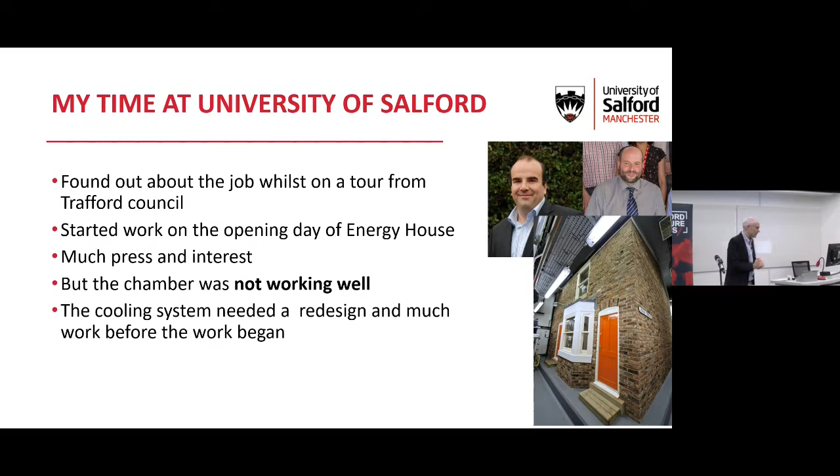So between ourselves, Nigel, who was there, and Steve, we got it all running and got it to where it is now, which is a world-class facility. But we had to do some work on it. Some people inside the university weren't happy with what I was doing and what Energy House was doing. I used to get nice notes stuck on my door by very senior academics every morning for about 6 or 7 months. I used to throw them in the bin and have stand-up arguments with academics about what we were doing and why it was the right thing to do. After a year, it went away, and when the cooling works were all complete, I started my role.

Around this time, myself and Will - there was only me, Will, and a guy called Mo when we first started. We set up the Applied Buildings Engineering Research Group, and then Will became my boss. That's generally what he does - he just stands and looks up at things and gets things done.

So why do we do all this? It's probably quite obvious to many in the room why we do it. Climate change is happening. The Earth's surface temperature is gaining heat very quickly, and it's up about 1.1 degrees since the pre-industrial era. We've had the 7 warmest years between 2015 and 2021. This happens most across our land rather than across the sea, and it's also more than twice as fast in the Arctic. So we've got severe problems all across the globe.

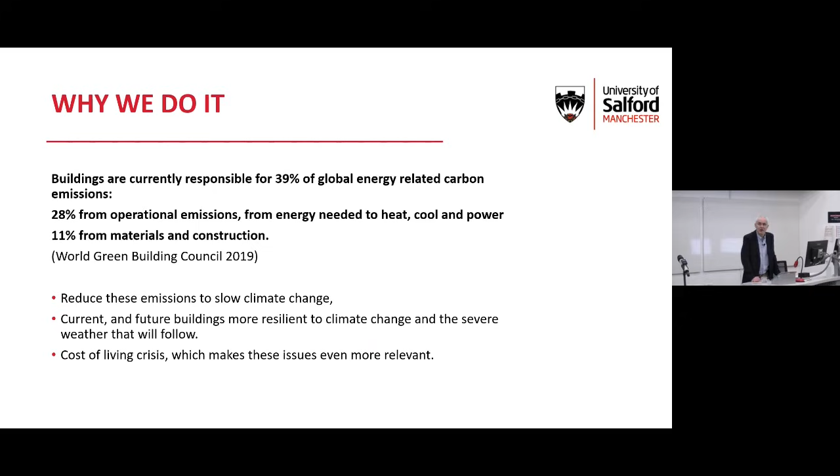So the UK, as it stands now, has the worst performing housing stock. About 80% of the homes that are going to exist in 2050, we've already built. So it's too late, really, to think that the new build sector is going to fix all our problems. The UK has been insulating lofts and paying for this since the 1970s, and yet about a third, 31%, of our homes - 8 million of them - still don't have easy-to-fix loft insulation.

So people just don't take up these measures sometimes, even if you give it to them for free. Again, about 30% of cavities can be filled, but they aren't - 3.8 million homes still left that are classed as easy to treat. There's no reason why these buildings can't be treated.

The worst of our properties are the solid wall properties, which we represent in Energy House. That lets us look at the very serious problem with solid wall, because these are the homes that have had basically nothing done to them. About 9% of them have been treated, so we've got about 7.7 million left to go in the UK, which is a massive number.

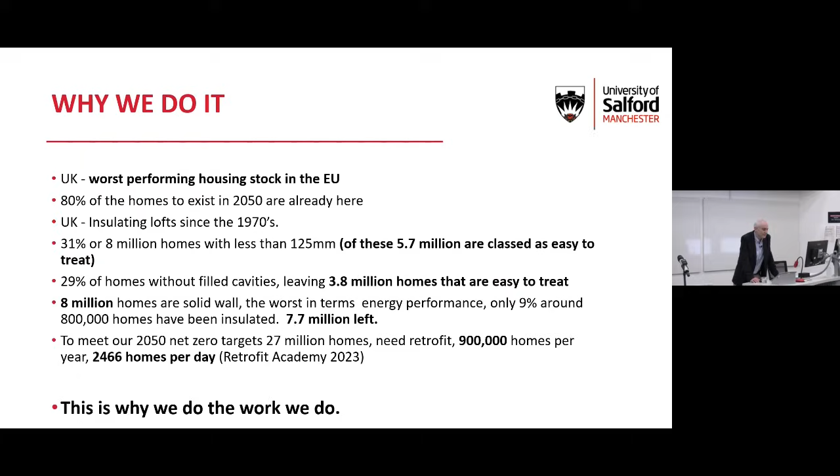And speaking of massive numbers, if we are to get where we need to get by 2050 for our net zero targets, then we need to retrofit 27 million homes. That's 900,000 homes per year, 2,466 homes per day. And the slower we take, the longer it's going to take, and the worse the problems are going to be.

So how do we do it? We have 4 strands to what we do in our research group. We tend to look very much at the decarbonisation side of things, so that's reducing the energy that buildings need to run them - to heat, cool, power and light them. And then we look at embodied energy.

So how much energy goes into a building at the start of it, during its operational time, and then at the end of it as well. How does that carbon cycle work?

Adaptation. So like I said earlier, we need to look at increasing temperatures across the globe, more extreme weather, and the biodiversity side of things. How do we kind of engage with all those things and make sure our buildings can work for the future?

Energy transition. So we are going to move the way that we heat and power our homes. We're going to go electrification, we think, on the heating side of things. Same with transport. District heating will become more common. And hydrogen, well, I think the jury's still out on hydrogen, but we'll wait and see.

Digitization is the final piece in the puzzle, which basically means that we have a lot more data flowing from houses now. So we have our smart meters, smart thermostats and heating controls and things like this. How can that have an effect on what we do? But more to the point, how can we make life easier for people to save energy? And then layered over the top of all that is the data services that we can use to do that stuff with.

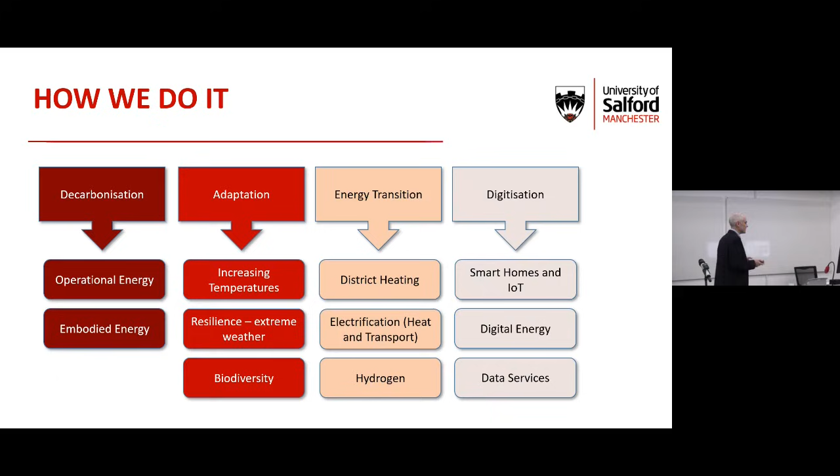So how does Energy House Labs kind of fit in with that? There's a lot of people who are really focused on energy savings measures, and it's got a lot of stakeholders, this industry. So you've got the landlords, they need to know what's happening for their investments and their tenants. You've got the people who actually invest in the energy saving measures. You've got the policymakers who we meet fairly regularly now. You've got the product manufacturers who are developing these things. You've got the homeowners and you've got the house builders as well.

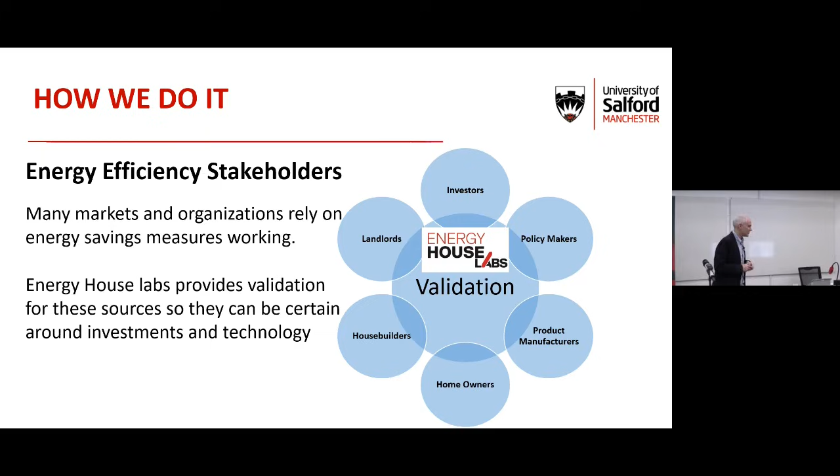So we like to think that Energy House Lab sits in the middle of those things alongside how we validate and how we measure the performance of energy savings products. So this is what we do.

So we have Energy House, which is our first project. We have a thermal measurement laboratory, which is all around how we measure the thermal performance of materials and how that can be improved. We have the Smart Homes and Smart Meters Lab. So that looks at the data side of things and how we can acquire data and make best use of it from smart meters and other infrastructure in homes. And last, we have Energy House 2, which is all around new build and looking at more of a global marketplace.

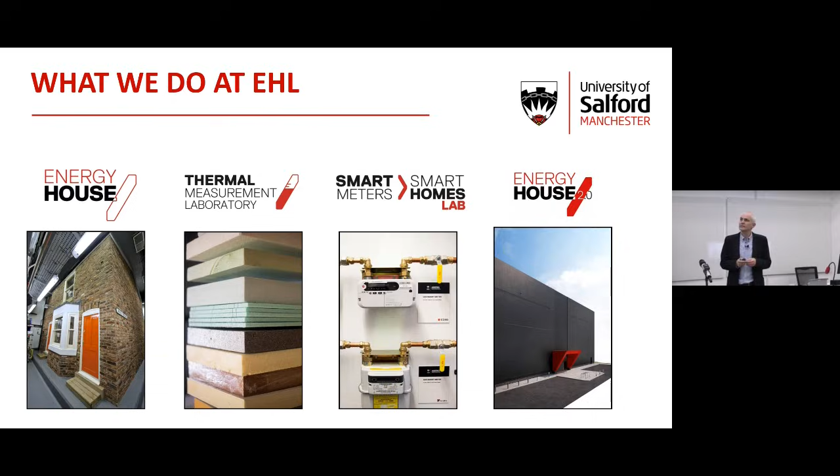And I think last but not least, Will touched on it, we're really proud of the charity, Friends of Energy House, or Friends of Energy House Labs, I think it's called now, not Friends of Energy House 2. So what we do there is we work with a lot of people who are really interested in things we do, and they also have corporate sustainability and things that they look at in terms of how they can engage with charities and how they can engage with helping people for the betterment of their lives.

So this is all focused around the Northwest. So we look at diversification of workforce, educational outreach, and supporting students and local community initiatives. So that's all based within the Northwest. And up to now, we've raised about 300,000 for that charity. And it's only been going 2 years. So we've done fairly well off that. And it's sponsored PhD students, undergrads, and other postgrad work as well. So we're kind of happy with that project. It's good.

So this is kind of where we started Energy House. We needed to do something, and this was before my time, but the difficulty still remains the same. We have the Climate Change Act, which brought about all the things that we talk about in terms of net zero and things like this. We have, like I said earlier, this problem with existing homes. We have the problem of how we assess if something is a good solution or a bad solution in retrofit. We needed somewhere we could do repeatable experiments. We needed high quality data, and we needed the ability to change the house.

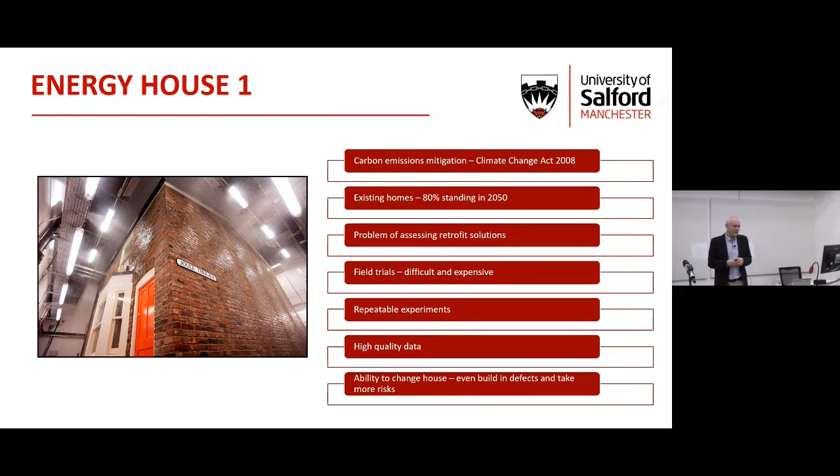So if you go to the house, the Energy House, at any time, you'll see that it's been hacked to pieces. At the moment, it's been insulated externally. It's had the floors out. It's had everything you can do to that building done. We needed somewhere as a playground for energy efficiency measures, really.

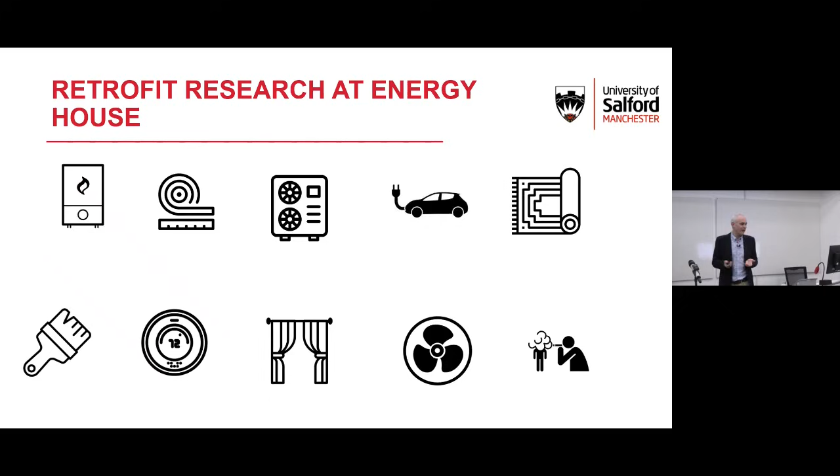So we look at everything across Energy House. We look at boilers, thermal paints, insulation - the air quality icon there is not perfect, I have to say. But we look at all the different things we can do, from high cost measures, full retrofits, right the way through to curtains and ventilation and other side issues, and EVs as well. When me or Dave or Will do tours around the facility and people ask what we've tested, we can pretty much answer yes now to every measure that people mention, which is pretty impressive.

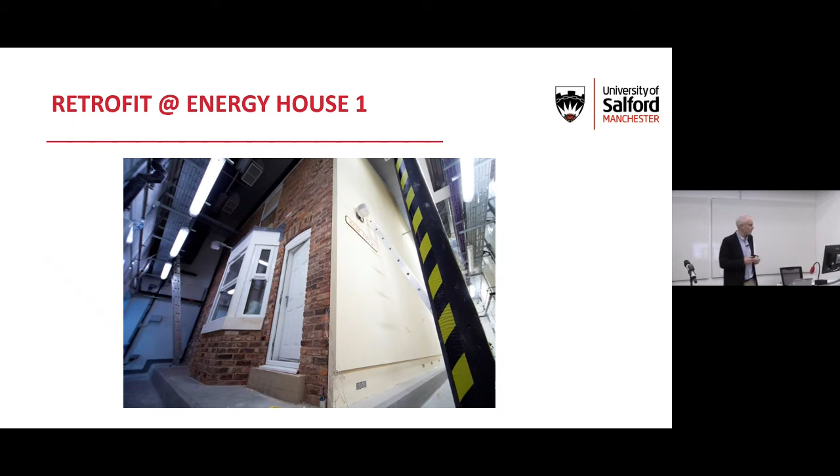So here we see the Energy House, a Victorian terrace in a large environmental chamber. We've externally insulated the building, but we do far more in-depth studies than this. The guys at the back here from Energy House did this work - Dave Farmer, Grant and Will.

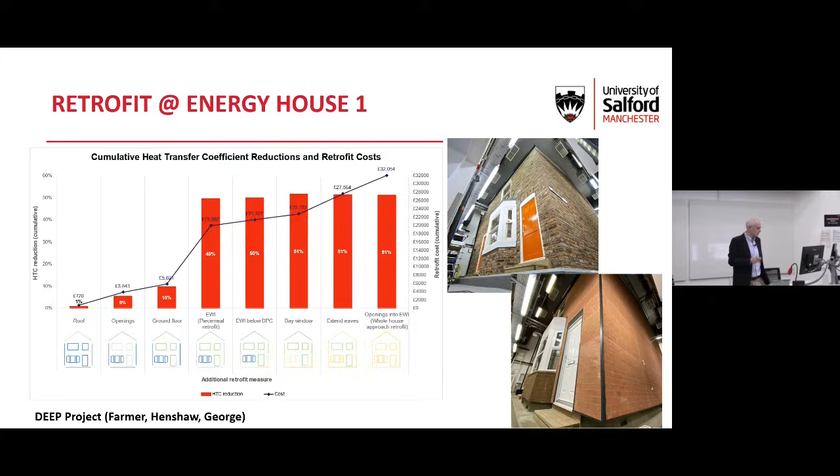Again, the same project from Dave's team - we're looking at where a gas central heating system starts to be slightly better or slightly worse than an air source heat pump. The point where an air source heat pump becomes a good thing to do for that building, where the costs are just about the same, is when we do the whole house approach, looking at the full picture. It's studies like that policymakers can take and say, right, this is actually when things work. And that's what they want to see.

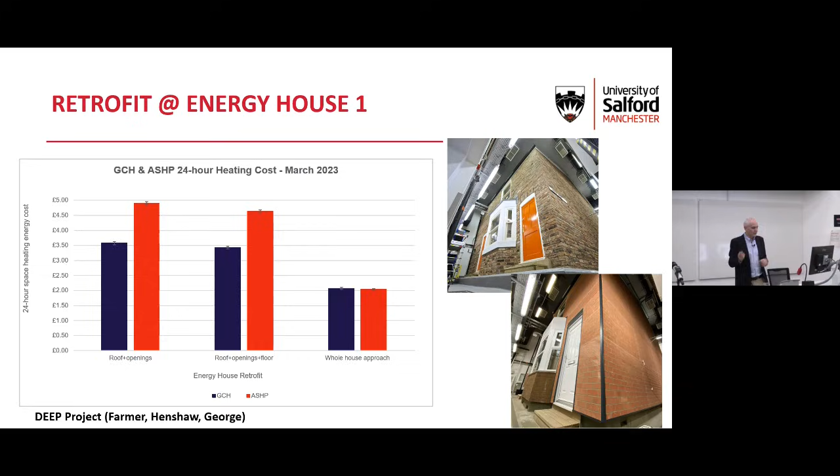It comes back to that validation piece of de-risking retrofit. Deep retrofit is hard, it's expensive, it's disruptive, and it's underfunded. I think that's what Deep told us - to do it right costs a lot, but it does save a lot at the end. And it's all about how we invest in properties.

So when we see solutions that are really difficult, we also start to think about things that aren't difficult, and some of the ways we can save energy that are low cost. Last winter we were funded by Nesta, a big charity in the UK, driven by a literature review and some data collection we did down at Energy House 1 with Dave's team. We looked across the low cost energy savings measures, and then Cambridge Architectural Research took our findings and literature reviews and built a profile of the UK.

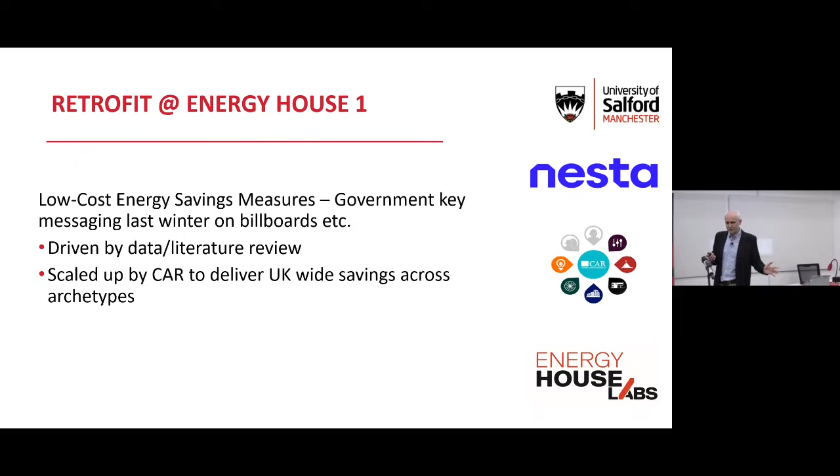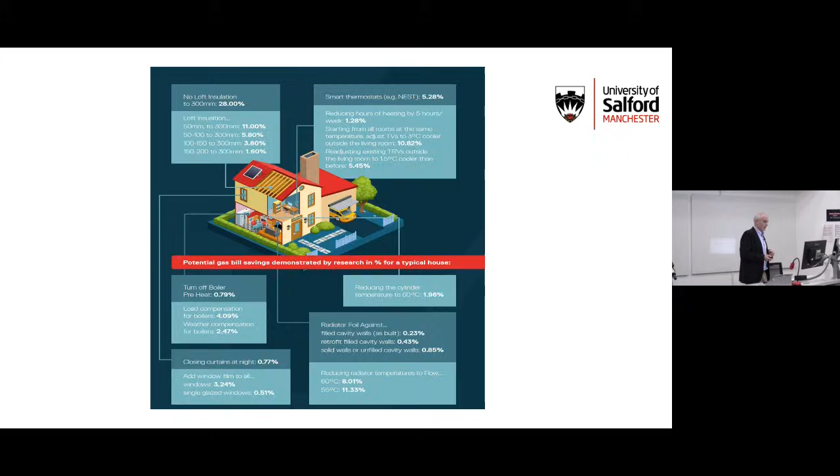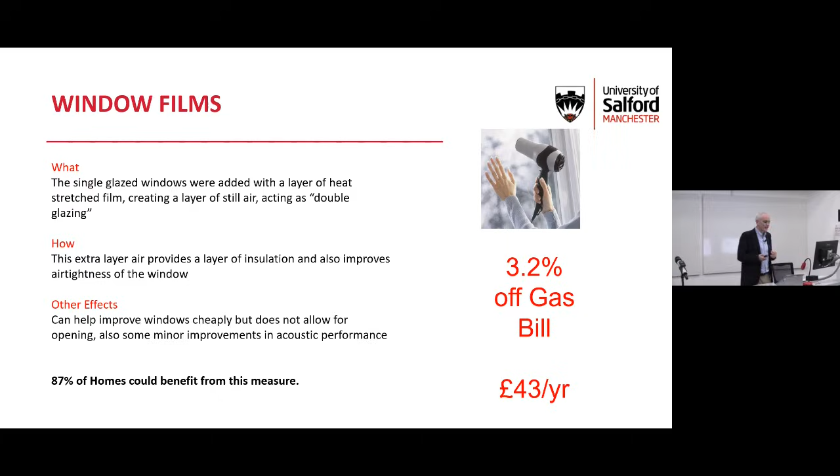So that's good. Again, low cost measures - we start to think about things like window films that could cost £8 if you do your whole house, and in the rooms you tend to heat the most, we can be talking about 3% saving off your energy bill. These are things that have never been researched before because they were seen as too cheap, too cost effective, no one was really interested. But when prices go so high, people quickly become interested in them.

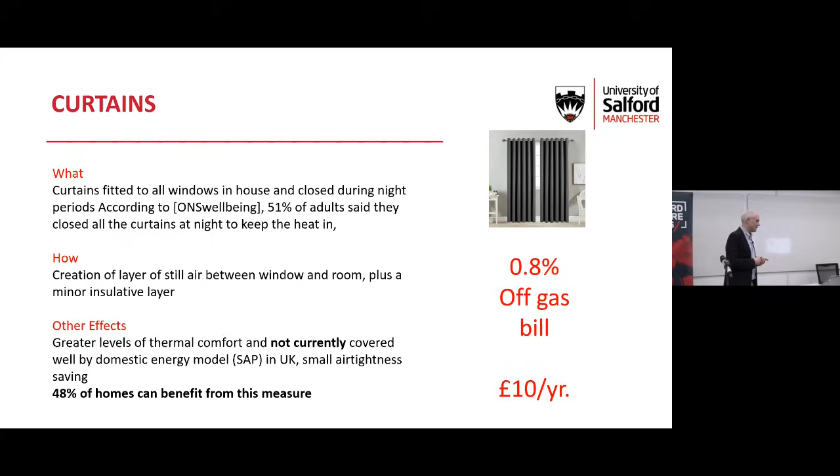Curtains, which Professor Swan daily teases me about - I spent a lot of time researching curtains in my past, and the point is everyone that comes to the Energy House asks how much energy curtains save. That's what they actually want to find out, nothing else. People are really interested in the low cost stuff. If you look at curtains in a typical scenario, it's £10 a year. Not massive savings, but we can benefit from it - 48% of the homes that the ONS looked at said we can benefit from putting those kinds of things in.

More importantly, this was done by Dave's team over at Energy House 1. We looked at combi boiler flow temperature, and this was actually featured on billboards, bus stops, national campaigns on the radio and TV as the key government energy saving measure.

This is about turning down your boiler to a slightly lower set point on the heating flow temperature. It makes the boiler condense more, becomes more efficient, and starts to work the way it should. When a boiler is installed, it's usually set around 75 degrees, and the heating engineer walks away.

If we can set them from 75 down to 60, we're talking about an 8% saving off your gas bill, £97 a year, and that figure goes up every time the price cap goes up. Things like this, that research had never been done before. Dave's team provided the fundamental research to the government messaging for the entire winter season.

People thought it had been done before, but when you look into the data it's just a made up number. So that's what we're good at: providing the evidence and finding out why things can actually save.

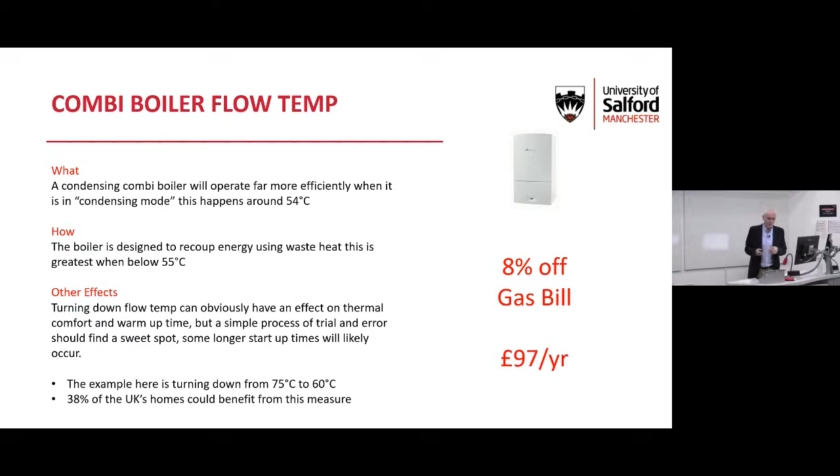So these aren't small numbers. My measly curtain research could save 142 million a year. The window films, if every house that we thought could do it did it, that's £1 billion a year. Boiler turn down, another £1 billion a year of energy that could be in people's pockets rather than heating the rest of the outside world.

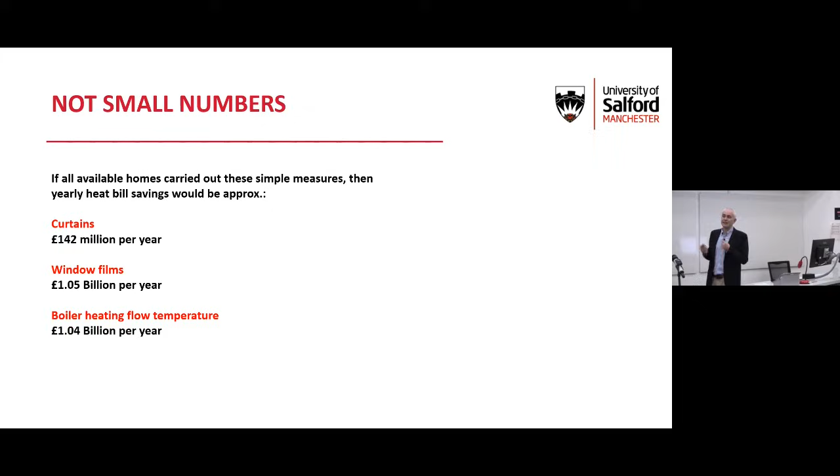When we're talking about the cost of living crisis, people aren't necessarily interested in doing full massive retrofits and building new houses. They're interested in this stuff, and this is what makes the difference.

So when we do see these quick fix solutions, we also see things that don't work as well. I take particular pride in my job of finding things that don't work - it's what I enjoy most. We find that people offer savings solutions that are so good they can't be true. If something's too good to be true, it's not true.

Thermal paints are an example of this. They're often advertised with huge savings figures, and some of the figures we saw advertised didn't appear to be very realistic.

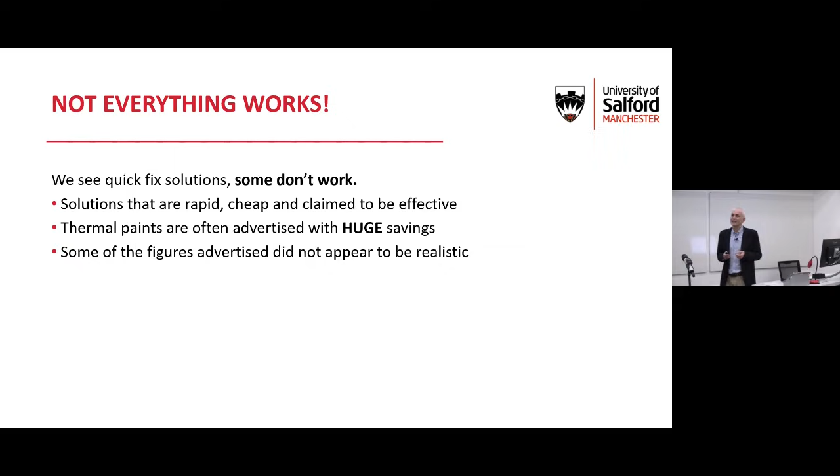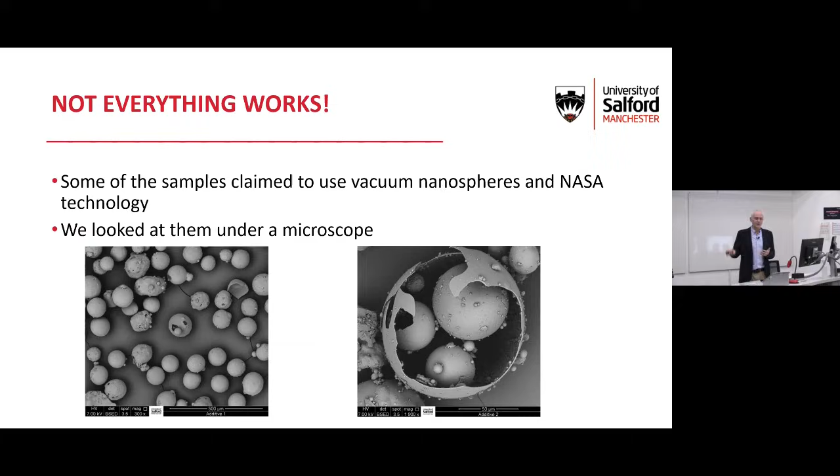So we took some of the samples - bear in mind, some of these claim to use vacuum nanospheres and all the other technological buzzwords we like to hear. I'm no expert in vacuums, but I know you can't hold a vacuum in something that's shattered to pieces like this. When you look at something very closely under a microscope, you start to figure out how these things are being portrayed as working, but when you look closely, they can't work.

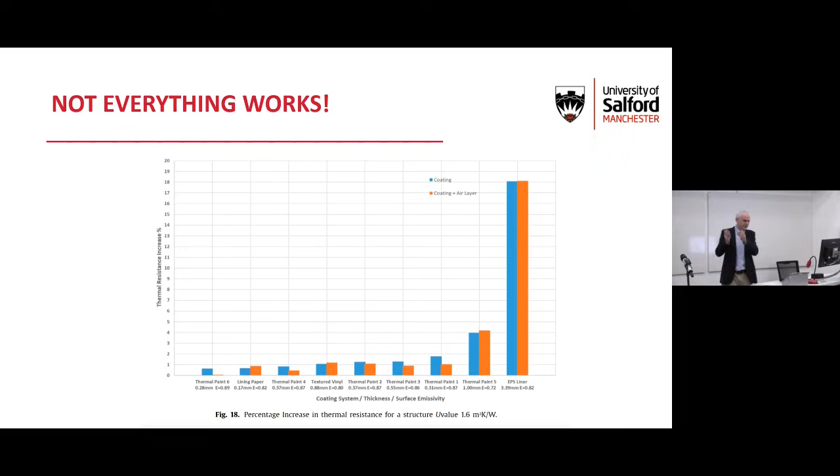So that tells you the savings being offered by thermal paint, and that's the saving being offered by something as simple as a thin sliver of polystyrene. Again, don't worry about the numbers, worry about this end column - this is how long it takes for those to pay back. The worst one was over 1,000 years, and the best one, which was still good old-fashioned EPS and liner paper, was 50 years. Bear in mind these take over £1,000 to install.

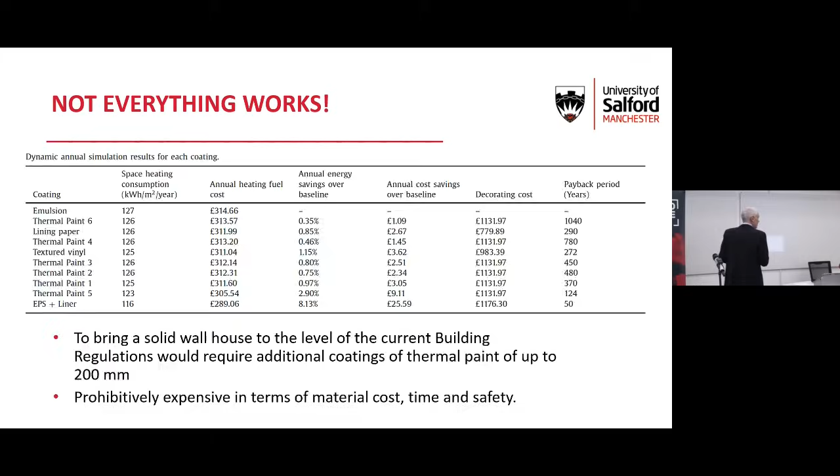The best saving that we found was 3%. So when we get newspaper and magazine adverts that say 25%, that's what led us to take this thing quite seriously, because there's a huge difference in cost savings and energy savings between something that works and something that doesn't work as it's advertised. EPS was far the best.

What I'd caveat this with is thermal paints do have their place. Reflective paints and things like this, if used in heat-dominated climates with very high rates of solar radiation on the outside of the building, will reflect and help save some air conditioning loads. They'll also help with things like mold growth - some of these paints will stop mold and condensation on your walls, but they will not save the 25% energy which they're advertised as doing.

So that's why we've got to do the things that save, and we've got to do the things that don't save as well.

So that's our retrofit side of things. We do stacks, we continue to do stacks, and Dave's facility is full up as long as he could ever use that facility. There'll always be someone waiting to use Energy House 1. And it still remains the only one in the world.

So we're over the moon with Energy House 1. Z House was our first foray into new build. We hadn't really done a great deal on new build, but we knew we had to do something. So Barratt's came to us and said, we're going to build the house of the future. Would you like to have it on your campus? And we said yes, and they built it on campus.

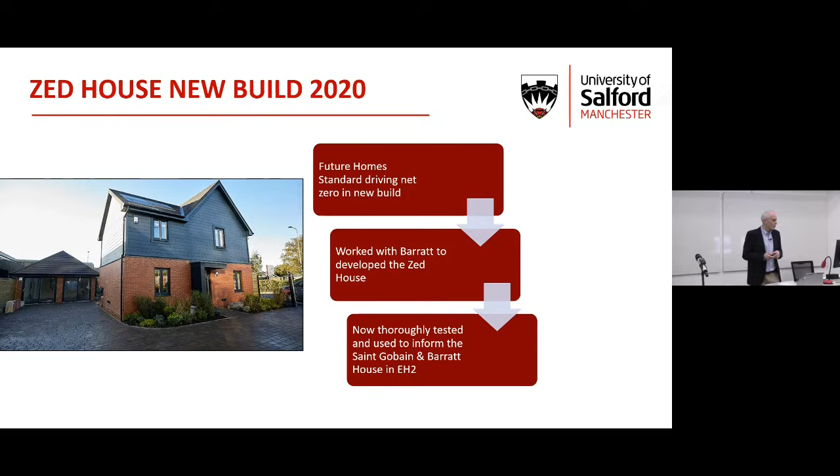So speaking of which, that's kind of when we figured out - or we probably already had - that we needed to do something a bit different than Energy House 1. Energy House 1 will probably always be our best friend. It was certainly where I started, but it had this fixed asset which is really difficult to change.

When we built it, it was difficult, and to take it down and build something else would also be difficult. But we wanted to keep it anyway - it's not something we particularly want to change. The profile was very much aimed towards the UK and Northern Europe, so -12 to plus 30 degrees C, and we had waiting times of more than a year, so we wanted to push that on.

Other universities asked me and Will to design facilities for them. We didn't particularly want to do that, and we wanted to retain the leadership in this area. So we wanted to maintain our standing of hopefully being the best at what we do.

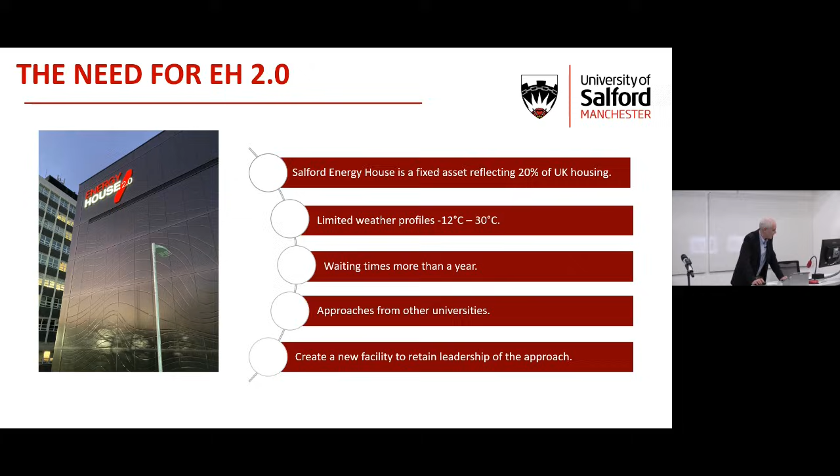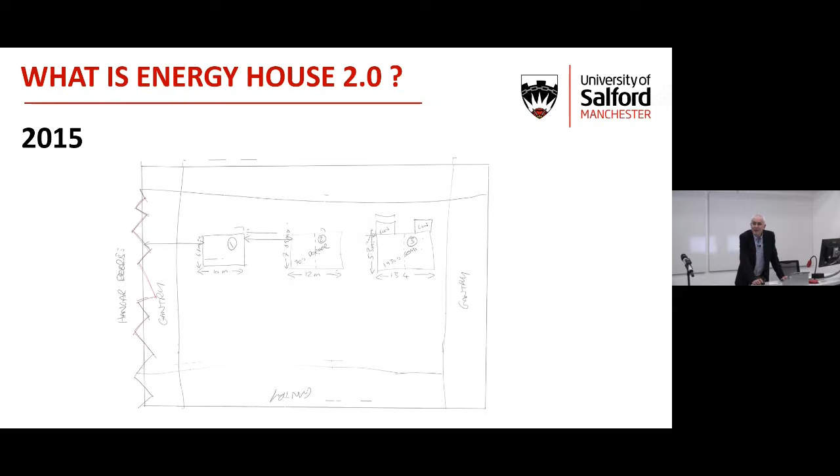2015 was when that pencil hit the page. 2016, we got the concept - again, all singing, all dancing. It had different plant rooms and different sections, and more than enough space to do anything we wanted.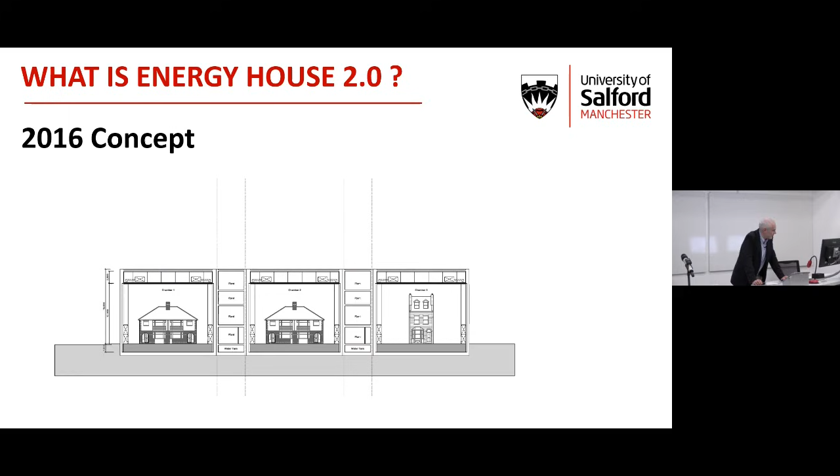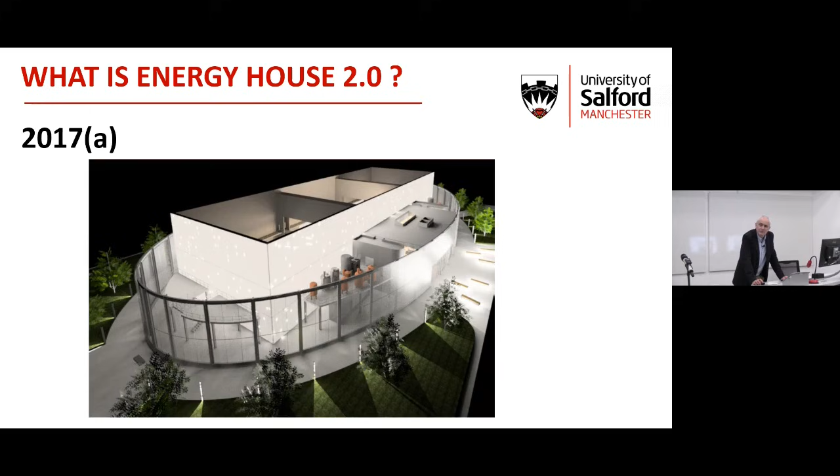Then we moved on to our next feasibility stage - bear in mind, 2 years have gone by here, nothing moves quickly in a university. It was looking pretty much like we wanted it to look. Then we value engineered the oval circuit from the outside, and this is what we ended up with, which we're happy with.

So it went through many different iterations before we got to this 2018 final stage, and one of the main obvious points there was: what could we afford? Okay, so this is basically what we could afford at the end of it.

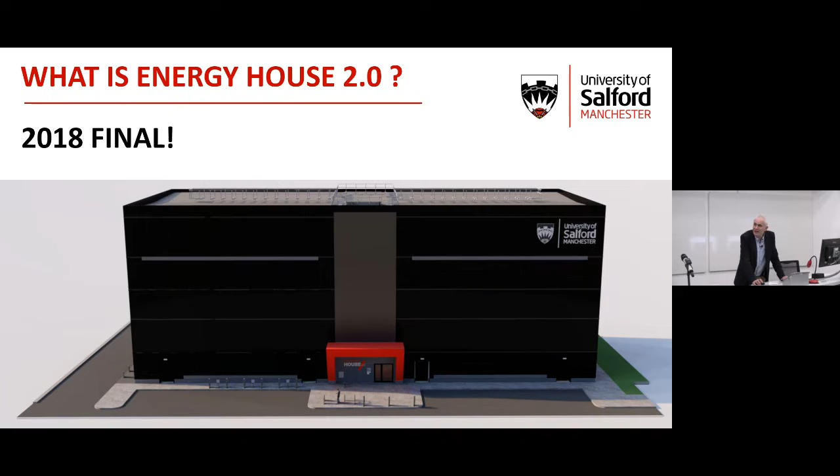This led myself and Will to go to the government, to Europe, to the university, to gain £16 million worth of funding for this building - Will led that, and it was quite a difficult task for him, but we did it. Then we needed to build it, which is where it was handed back to me. So we took down one of the most beautiful pieces of architecture on the campus, unfortunately, and replaced it with a car park, which allowed us to build Energy House 2.

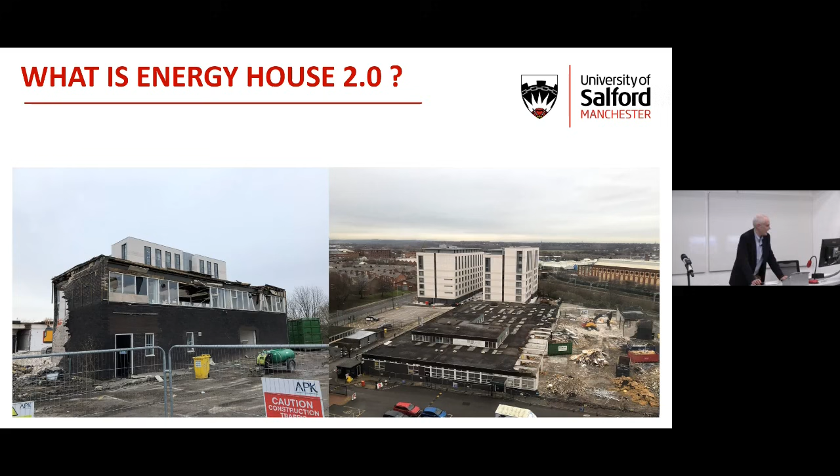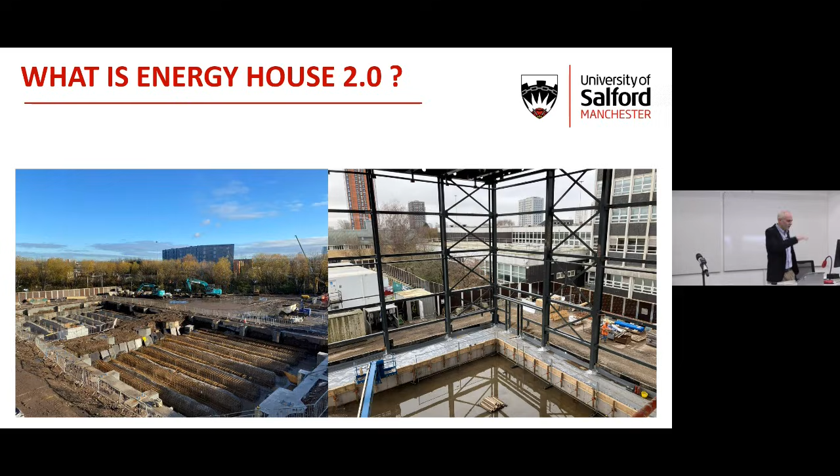So what you're looking at here is the foundations for Energy House 2, and don't worry, it will get more exciting. But the fact is that just underneath the building there's a couple of £1 million worth of building work just to support the environmental chambers. So it was quite an impressive civil engineering project before it even got out of the ground, and certainly totally unique for its time.

The next huge portion of work on this building was the HVAC - the bit that makes it hot and the bit that makes it cold.

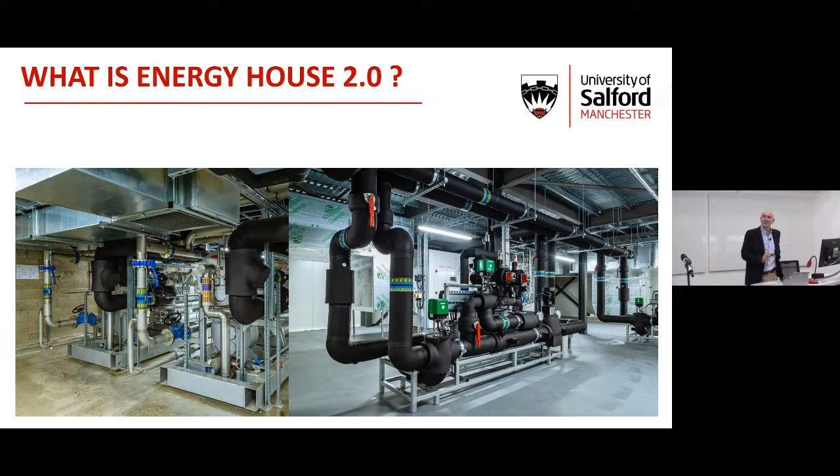There was, you know, a good between a third and a half of the money was spent just on the HVAC, which for a building project is unheard of. It was all in the machinery. So all of the expensive stuff is hidden away, up in a plant room, and the foundations no one will ever see again. But I assure you it's all there.

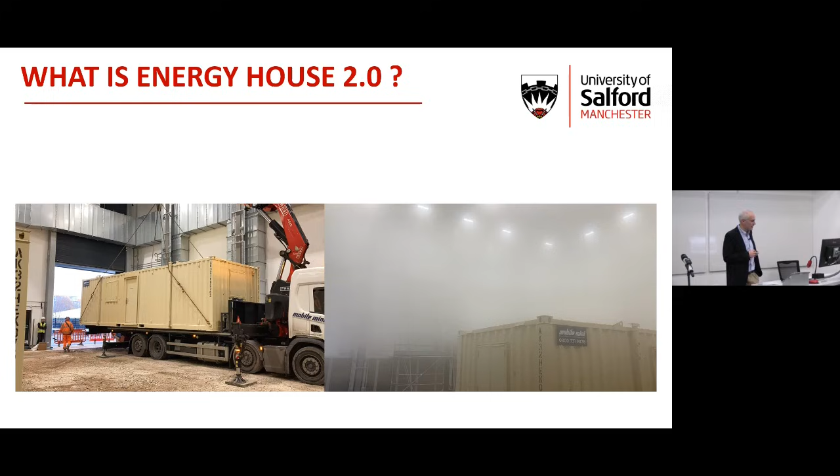So then we came to finish it, and then we came to test it. We didn't have any houses, so we had to put porta cabins in there, fill them full of heaters, and then had to fill it full of snow and everything else, and get the rigs all running without there being any houses in there. So this is kind of where we went from.

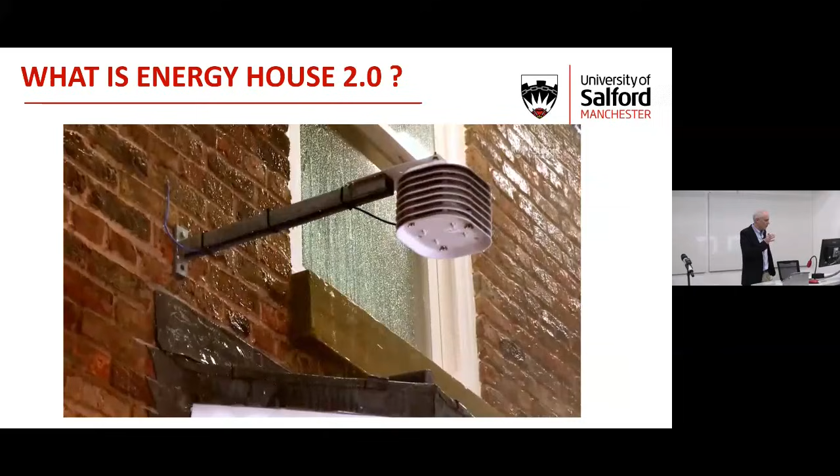So I'm going to talk over this video. So Energy House was obviously a key asset. It does everything it's meant to do. It does the wind, it does the rain, it does the snow, it does everything that we need that building to possibly do. But we could see ways that we could improve what we did, and we could see ways to make it a lot more flexible.

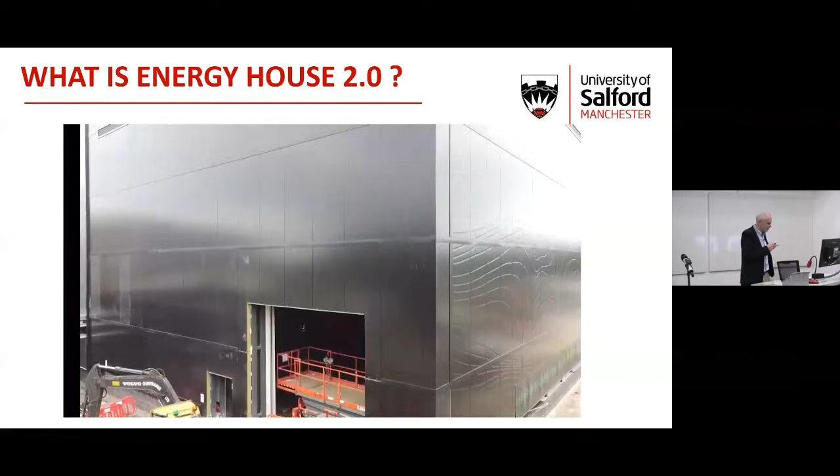So this is the building for those who haven't seen it. This is just as it was being finished. So it is a big kind of black box, that's as simple as it is. There's no windows because that would be solar gain, and it would interrupt the cladding and the continuity, the thermal side of things. It would just be quite difficult. So it's a bit of an odd place to work.

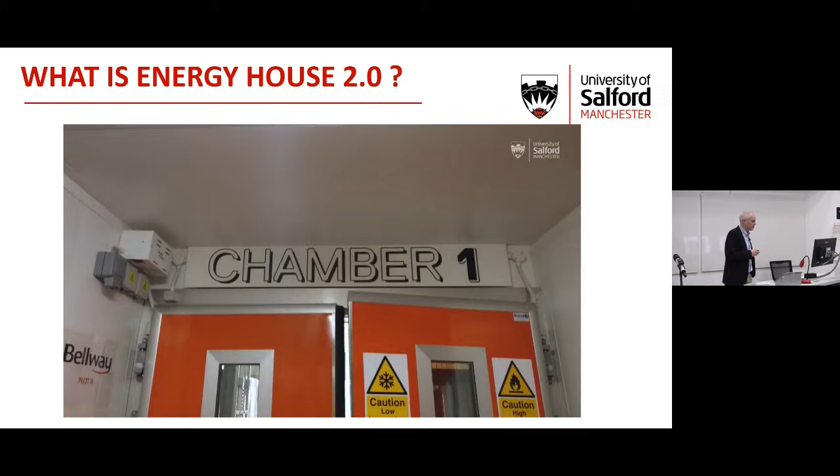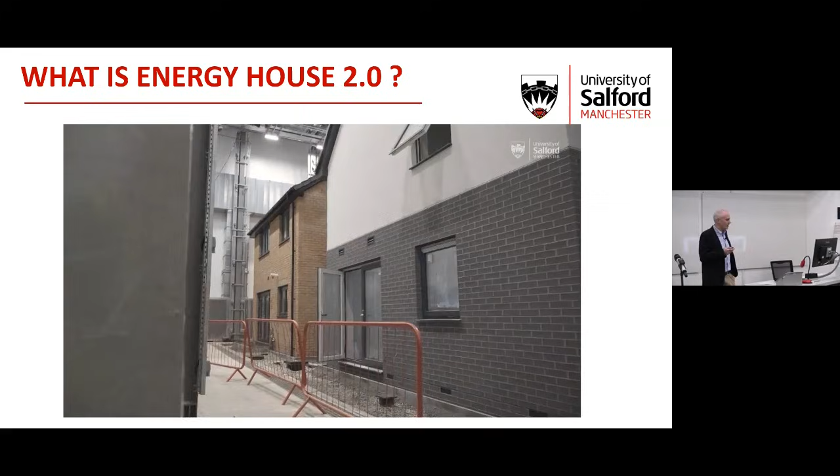These are the chambers, and as we go through now, we'll start to see kind of what it looks like in terms of scale. So where we went from having this empty building, then we had an open competition to the house builders to come in and suggest buildings that they wanted to build. And because it was a European project, that had to be done all fair and square.

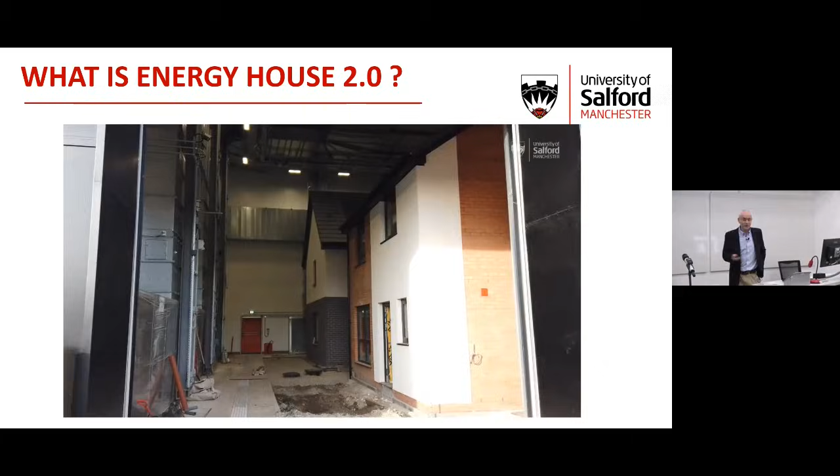So basically what we have is we have a house built by Barratt's, and we have a house with Saint-Gobain, and we have a house built by Bellway next door to it. So I'm just going to skim through.

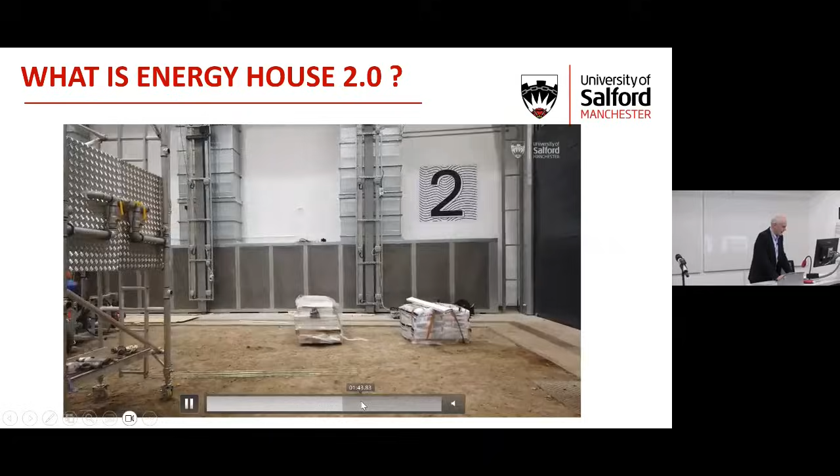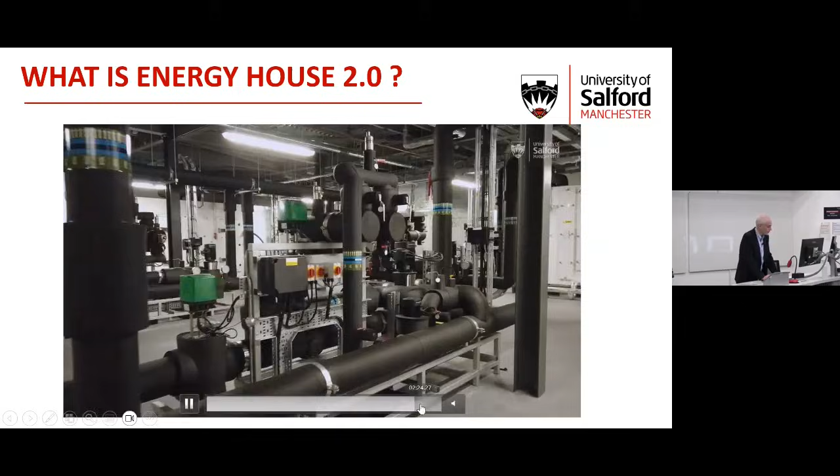So these are a couple of our rain rigs that we used to rain on the building. These are our empty chambers here, so they're no longer empty - I wish they were. This is the HVAC upstairs and downstairs, which kind of keeps it all working and all running. Again, that's difficult equipment to keep running all the time, but it does a very good job, and it's as efficient as it could possibly be as well. There's no point building a building for energy research that isn't kind of energy efficient. Well, I'm sure our energy manager will disagree with that.

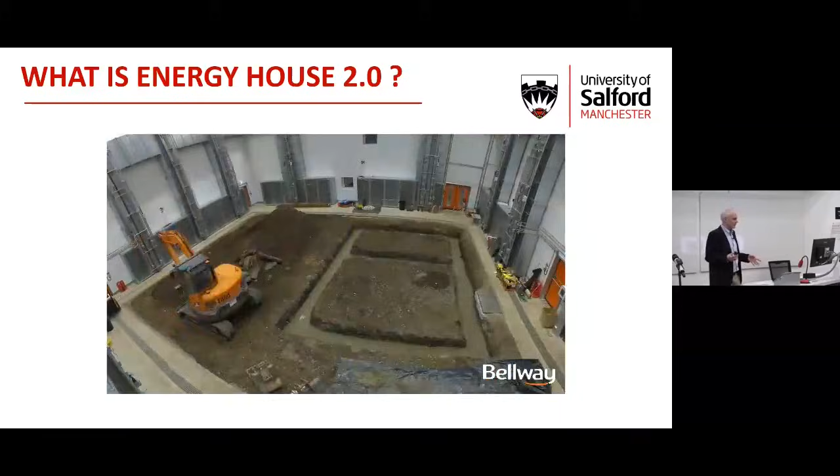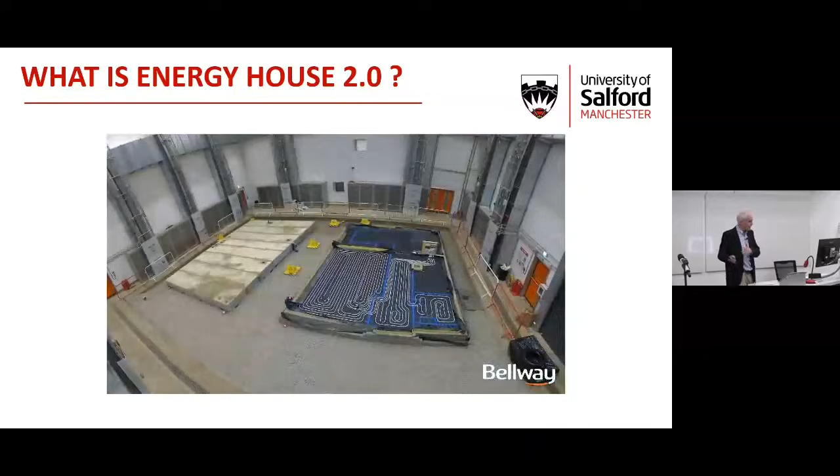So there we go. Just to prove that they are real houses, which we often have to do, because everyone thinks that they're kind of dolls houses or make-believe houses. These are real houses built with real foundations in soil that's protected from the outside world. So this is a house being built by Bellway on the right and Saint-Gobain Barratt on the left. And you'll see they had to share the same scaffolders, the same timber erectors, the same health and safety principal coordinator. This was a mammoth task, and they shared that.

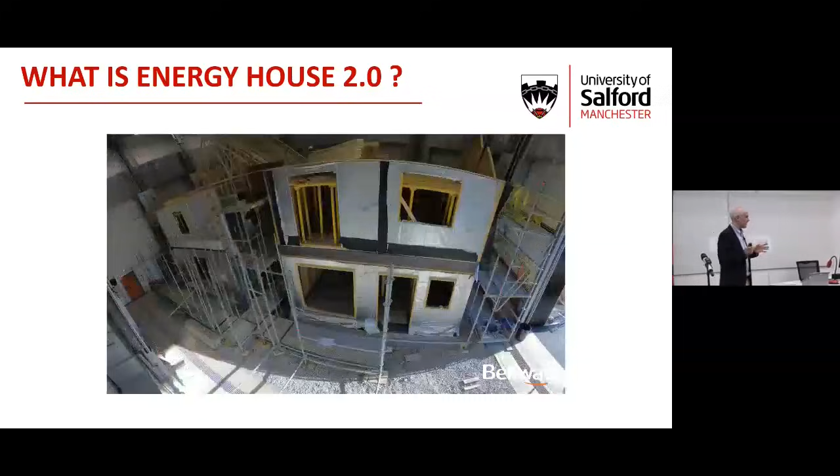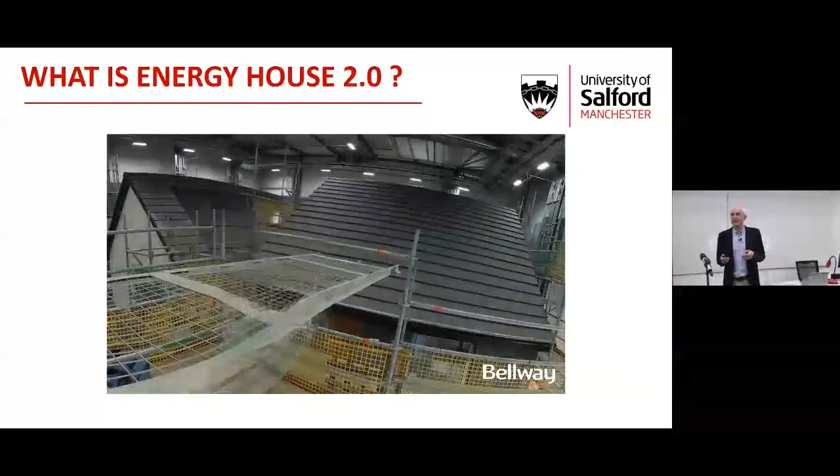If this was out in the real world, there would be a huge barbed wire fence right down the middle. They do not share, and they don't share their findings in the real world. They don't share anything. They certainly wouldn't share a chamber. But what they agreed to do, which was really impressive, was to do exactly that. They agreed to share the chambers, share the contractors, share the ground workers and all the other. They also agreed to share all their research publicly.

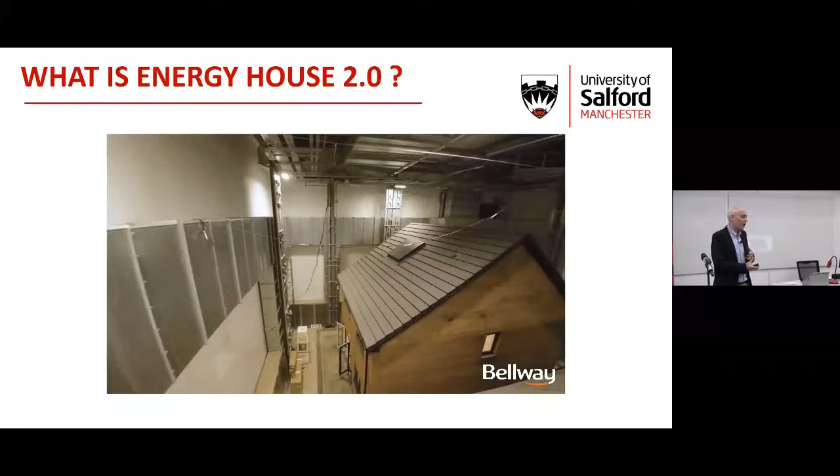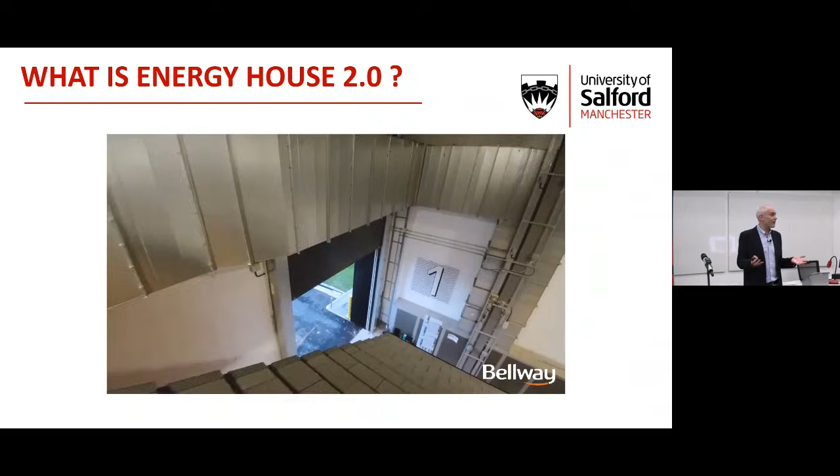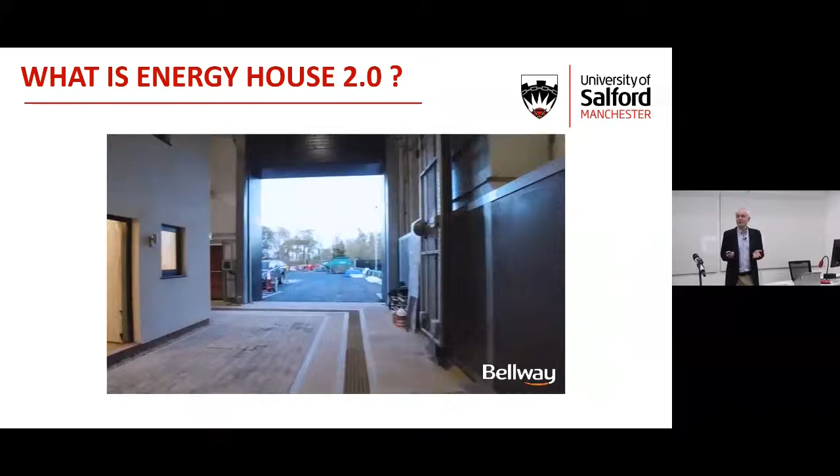So we've just put out a report, we'll talk about in a second, which says some of the issues with the buildings, and we found some problems. We found the work's good in some areas, less than good in other areas, but they've been very open with their research, and they've shared it with each other as well, which is really, really unusual for house builders. But it goes to tell you that when we're looking at the future of housing, the risk is too big for them not to work together and not to get it right.

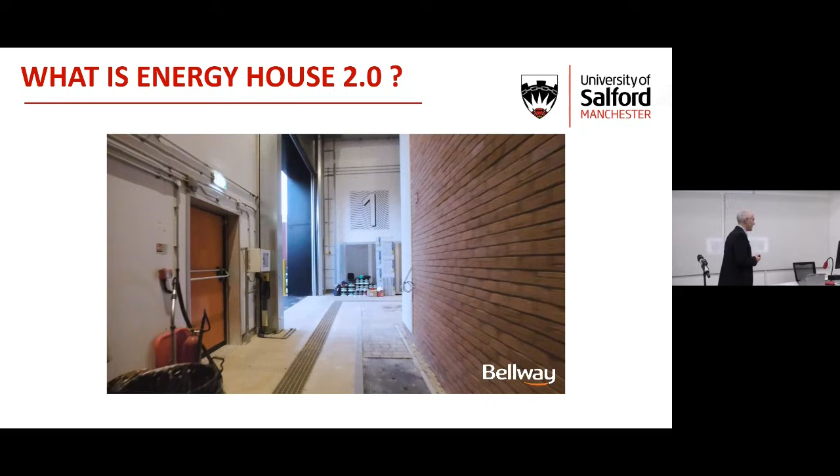So they also agreed to do things like not put the same heating systems in and not put the same ventilation systems in, so they've got a good overlap of the findings that they get at the end of it. We were really impressed that they did that.

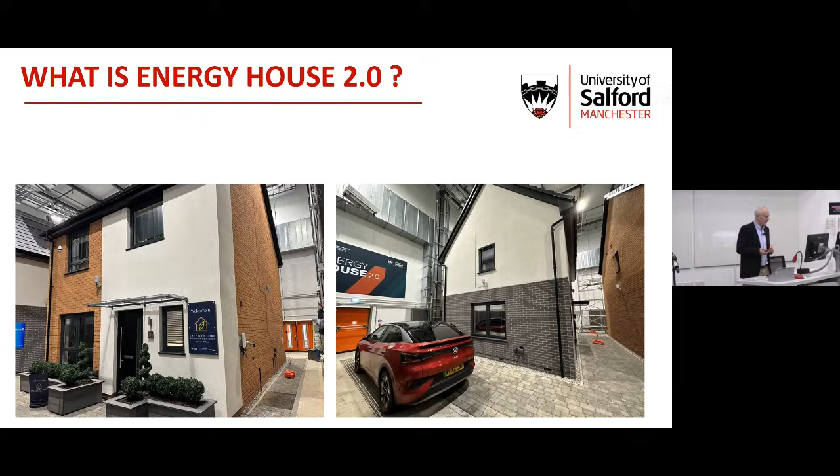This is how it looks now. So we did some work, well, we started some work with Volkswagen on the EV side of things. We've got the Bellway and the Barratt house there in the background. This is what it looks like with snow, which is what everyone wants to see, but it's really difficult to do.

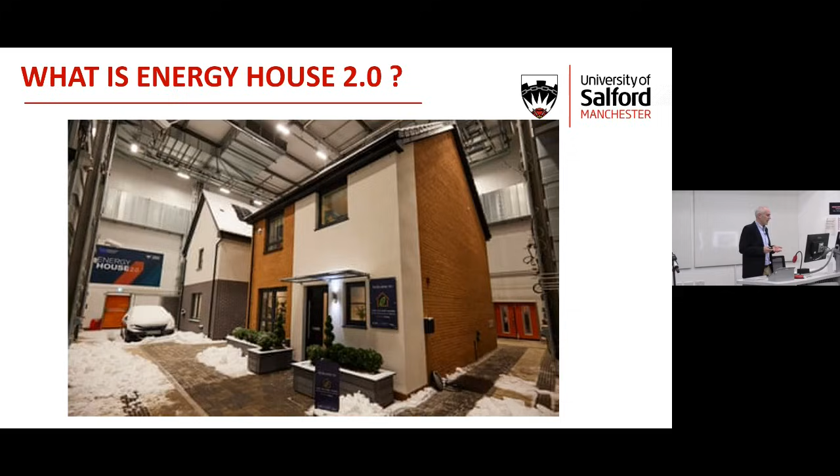It takes a long time, but in essence the project is a bit bigger than just those two houses. That takes up one chamber out of our two chambers. What we've got next door is very much at the moment an R&D centre, if you like, where people can just pitch up, build what they want, and then we'll probably take them down in short periods of time. Whereas I think the housing in the other chamber will probably be with us for maybe 4 or 5, 6 years.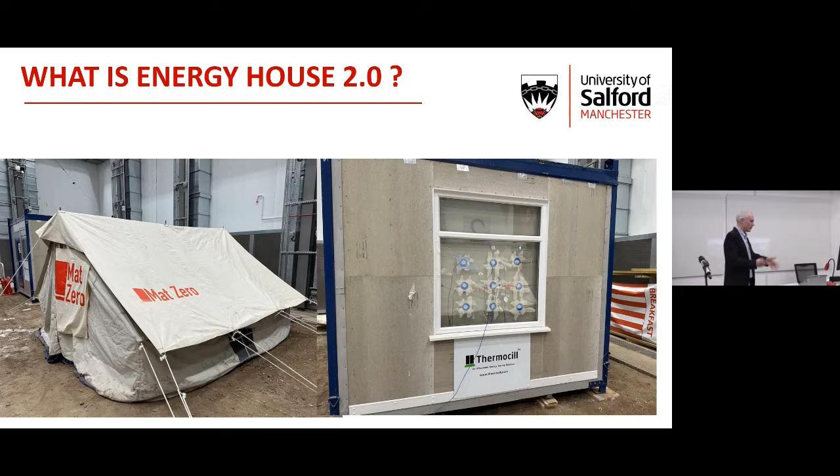So it's a good example of different things that we can do, not just working with the big house builders, but working with small SMEs, people working in charity projects, and all the rest.

This is our newest building. This was a spin out of the Graphene Centre down in Manchester. And what this was is the Vector Homes, who are the guys here, Liam and Nathan - they aim to create the most cost-effective home to build and to run in the UK. So this is all about providing mass housing for the social sector and able-to-pay sector as well.

But the idea is that it's built from this lightweight steel frame that you see there on the left. Everything can be moved by hand. There's no cranes, there's no machinery needed to build it. It's all basically hand movable. And the insulation, as you would expect from the Graphene Centre, is being reinforced with graphene content as well.

So that project to us is really different, and we're really looking forward to seeing where those guys go with that project, because it is a starkly different way to build a home when you compare it to the ones that are in the neighbouring chamber by the mass house builders. So yeah, it's quite an exciting project for us, that.

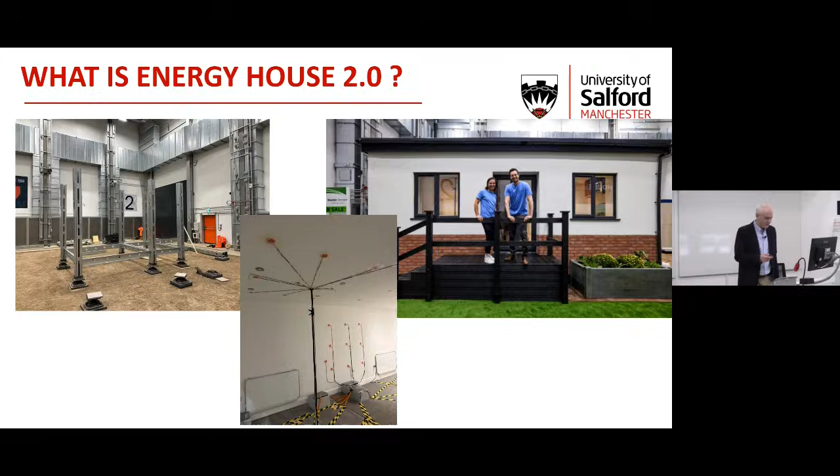So what did we find? Don't worry, we're on the final furlong now. We're getting there. There's only 400 slides left.

The Future Homes Standard will change the way that we build buildings sometime in 2025, yet to be agreed by government. The main differences will be these: there'll be much less carbon, 75% less when compared to 2013 regs, and they'll be zero carbon ready. What does that mean? It means they're pretty good in terms of carbon, but as the grid cleans up and we get more renewables on it, in several years they will become zero carbon. So zero carbon ready is the phrase they use.

They've got a very efficient fabric, so they're well insulated with good levels of air tightness. They'll have lower running costs, probably solar PV, probably batteries, and EV chargers will be very commonplace. Air source heat pumps will be what they use, we predict, and there will be no gas. 2025, no gas in new builds.

We're really lucky because they put out with the Future Homes consultation, just before Christmas, the kind of building they're looking at, their notional building. And our houses are very, very similar to that notional building. So we see there's plenty of mileage now in those houses as research projects. They will be the houses of the future. They don't look particularly different or special, but that's what we'll be building. So they were great, but now they're super relevant as well.

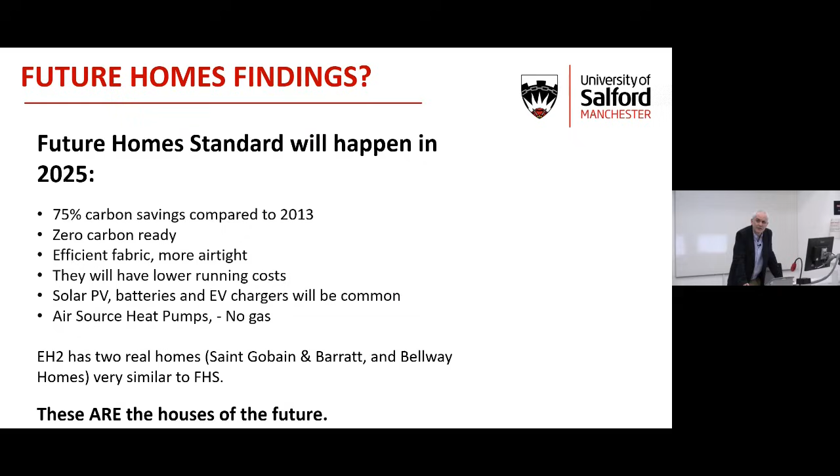So we tested them, and we tested them in a lot of detail, and we found some things that were good, some things that were bad, but we found ways we could improve them. We looked at the air tightness, how much air leaks out of the building and how much heat is lost through that mechanism. We looked at how efficient the building elements are at retaining heat - the windows, the walls, the floors, the ceilings.

And they both performed well. Past trials - with our partners over in Leeds that we've done a lot of work with - they carried out a lot of research on buildings out in the field, on new builds. So what you see here, these blue lines are all of the buildings that Leeds have published data on.

So we've got gaps there - this is the gap between how they performed and how they were designed, in terms of heat loss. Some buildings are taking 140% more energy to heat than they were designed to, right the way down to our samples here, which are the two in orange, at 8% and 4%. So we're happy with those, and the house builders, I think, were happy as well.

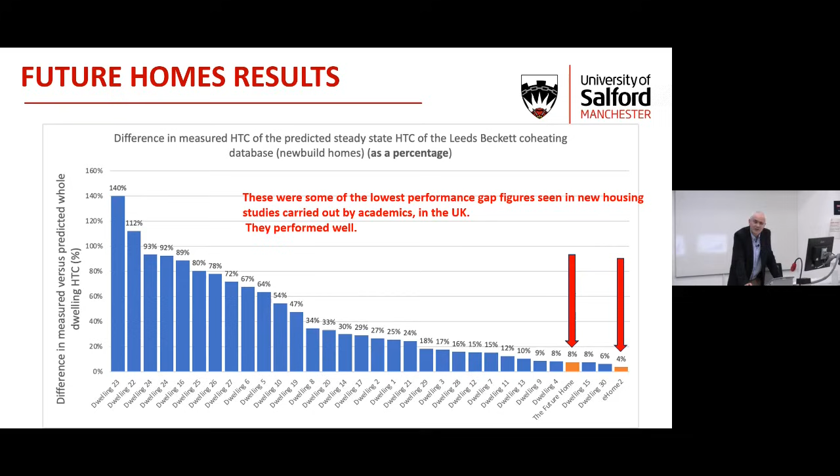So they're very low performance gap houses. It shows that we can build these houses, and they're not impossible to build, and they can be built at scale as well, because these are mass house builders, don't forget. These aren't grand designs or footballers' homes - these are something that the masses will live in.

So the Bellway, the heat loss was 7.7% worse than the design, which isn't a great deal. The air tightness of the home was quite a significant amount worse than the design - I'll talk to you about why that might be in a second. The loft insulation was disturbed.

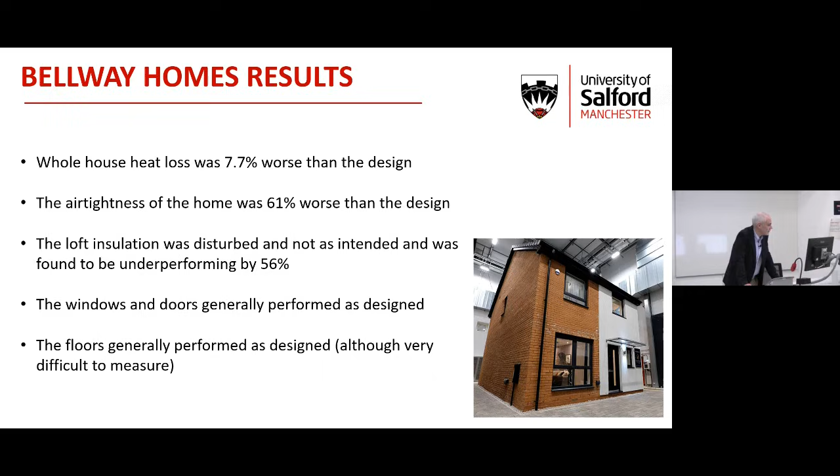We see this a lot in new build - we see a lot of trades get involved in the loft. They go up there to fit PV and batteries and lights and other things, ventilation systems, and it gets disturbed a lot. So we often find the loft insulation is performing less than optimally, shall we say. The windows and doors performed as designed, and generally the floors did as well, but we found the floors very difficult to measure, it's safe to say.

So overall, it performed well. What we've done with the house builders is made them stick with these homes now - we're not going to let them go back in and make improvements. We're going to make them stick with it, because our next batch of tests will be looking at heating, so we need to know what these realistic houses cost to heat.

We're not going to allow any kind of going and fixing, which the house builders have agreed to and they're happy with. So we think the main issue is air tightness, but bear in mind Bellway put 6 different heating systems in that building - you would generally have one heating system - so there's a lot of holes where it wouldn't normally be.

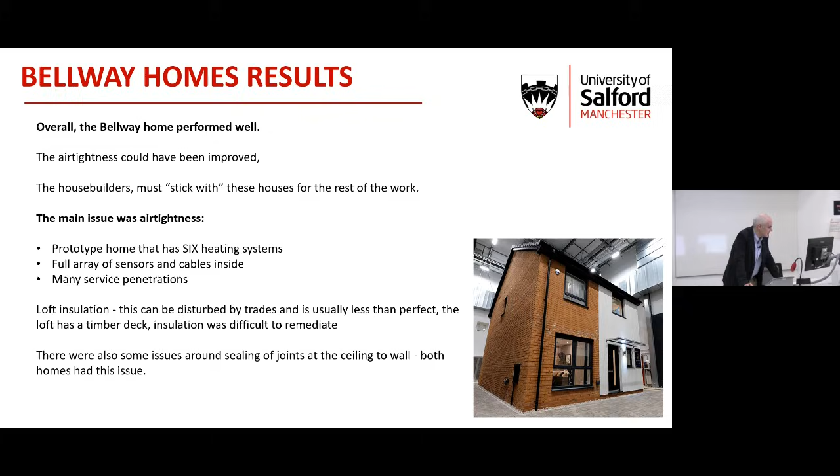We probably put about 3/4 of a kilometre of network cable in there, and all the sockets to go alongside it - again, that makes things a lot more leaky than it should. And there's a lot of service penetrations coming in and out of that building as well. The loft insulation generally is less than perfect and disturbed by the trades, and there were some issues around the ceiling joints where the wall meets the ceiling upstairs. But all in all, a positive start.

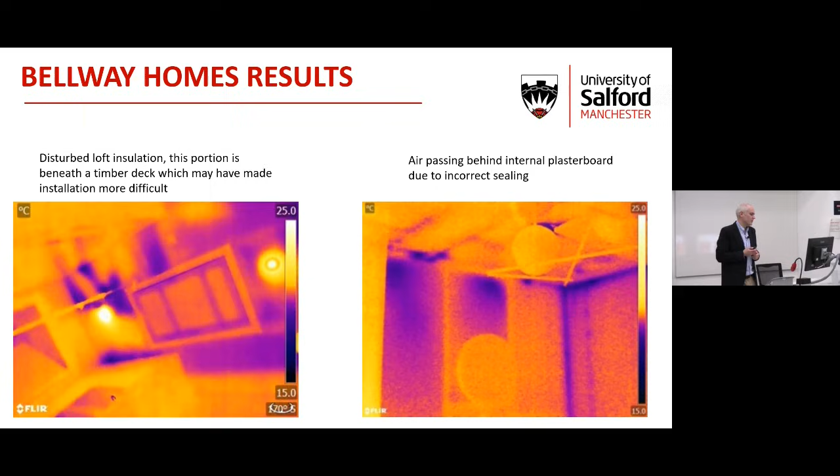So these are some of the defects that we see. This is the loft insulation, and this is some of the poor ceiling around the ceiling-to-wall junctions.

So the Barratt house was 3.9% worse than the design. Again, very small. Air tightness was actually slightly better than the design, 6.3%.

But we did find some problems in the panels. This was built out of timber frame, both houses were, where some of them hadn't been manufactured quite as they would liked, and they were losing more heat than they should. But still, you know, these are small, they're big percentages, but small numbers in terms of heat loss.

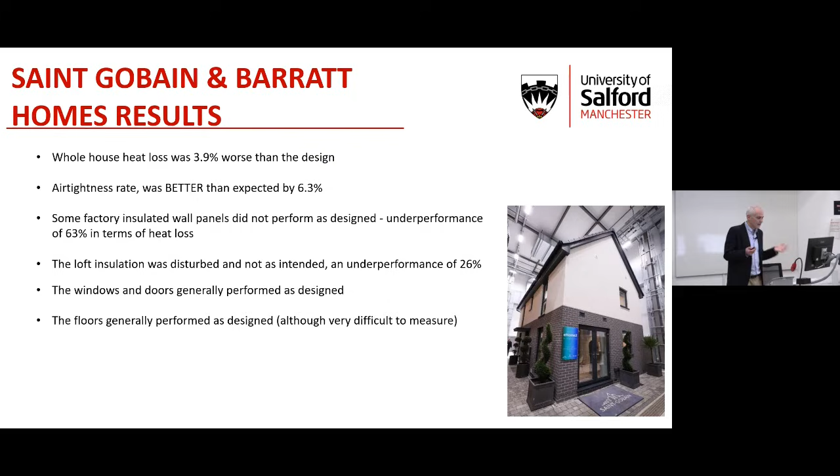The loft insulation was again disturbed at an underperformance of about 26%. But again, the windows and doors were generally okay, and the floors were generally as good as we can measure them to be okay. And here's some of the problems.

Again, you've got this disturbed insulation here. You've got the kind of heat loss towards the bottom of the wall there, and that's to do with, we think, air cycling through the back of the panels. So not 100% perfect, but a really good start.

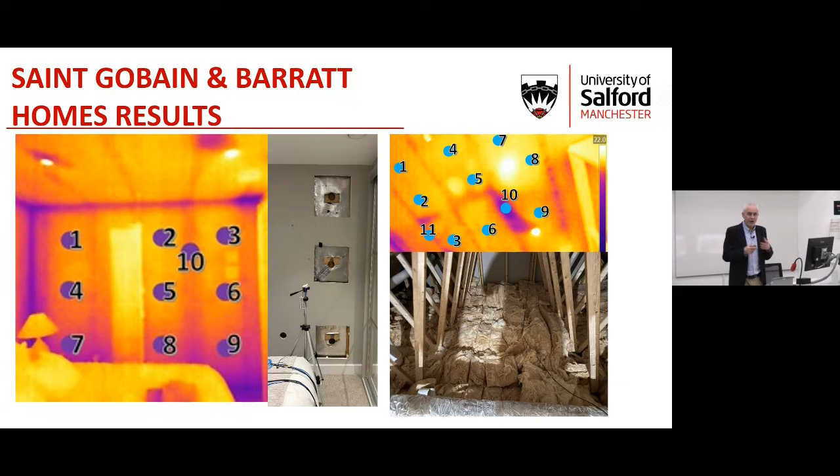And we gave the house builders and the product manufacturers some really good feedback to help improve these. So for instance, Saint-Gobain are going to build a small version of their house out of the same timber frames and get that system working exactly as it should.

Again, the main issues on Saint-Gobain were these assembled wall panels, assembled in a factory, but they just didn't get it 100% right. So we dismantled it. We took it to pieces to find out what the problem was. We took the wall apart, we cut holes in it, and eventually we found out what the problem was.

So again, the air tightness of the building was better than designed, but they had 2 heating systems rather than 6, so probably less holes. And we thought that the panelized structure they'd used, because everything was brought in pre-manufactured, might have helped.

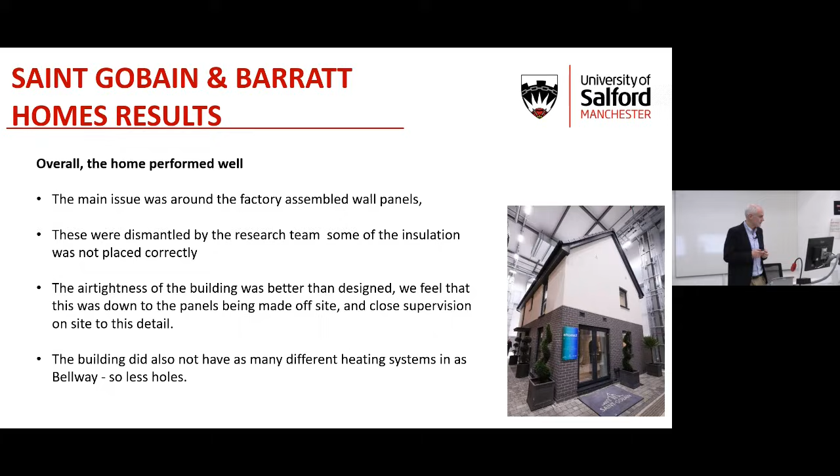So how do we get to net zero? That's what we came here to find out. I'm not going to tell you really. Charlie will be very disappointed.

But I think what we can safely say is that the existing stock is definitely the problem. The work across all of our labs says that to make these significant improvements is really difficult. It's really complex, far more complex than most people think, and it's really expensive. But without this work, the UK just won't hit these targets because the new build isn't going to save us.

It's got to be the retrofit that we need to look at. Simply adding heat pumps doesn't work. The buildings need to be carefully assessed and retrofitted well, in a manner that's sympathetic not only to the building but to the occupant as well. You can't miss out the occupant in these things, which often is the case.

There's definitely no simple solution. There's no one size fits all. It isn't just doing the same thing to every type of building. Workmanship, design, and the appropriate measures are all absolutely critical.

And retrofit can present many risks. It can be a risk to the building fabric, and a risk to the building occupants if it all goes wrong. But the biggest risk is not doing it, is just to ignore it. And we may, frankly, run out of time. Because if we saw the numbers right at the beginning, I forgot what the number was, 2,000 a day. There's a lot to do, and not a lot of time to do it in.

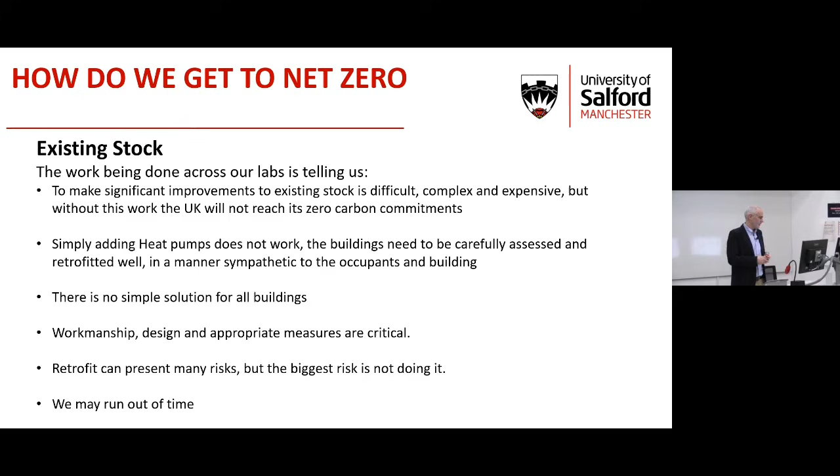The new build is going okay. From the studies you've just seen, that's compelling. We're getting it right, but we only build 200,000 houses a year at the moment, so it's not enough to make an impact on this zero carbon target that we've set ourselves.

The Future Homes Standard is a significant improvement, but some people might say, does it go quite far enough? We can see that the fabric performance, we are getting there with mass house builders. They're good results. They're fantastic results, I would say.

The data will be made public. So all of this data is out there, and anyone can access it. The full data sets are out there. So hopefully that will mean that the likes of Bellway, Saint-Gobain and Barratt are paying for this research, obviously, as we can see. But a small SME builder who maybe builds 5 or 10 homes a year can't afford to come and build houses in chambers. So hopefully they will benefit from the work we've done.

Heating and hot water is our next research piece, and we think these are going to be the next big challenges. Fabric, we think is pretty much there, but now the big thing is going to be around air source heat pumps, infrared, underfloor against radiators, and all the different kinds of questions we can ask ourselves around that. And then hot water was the final piece.

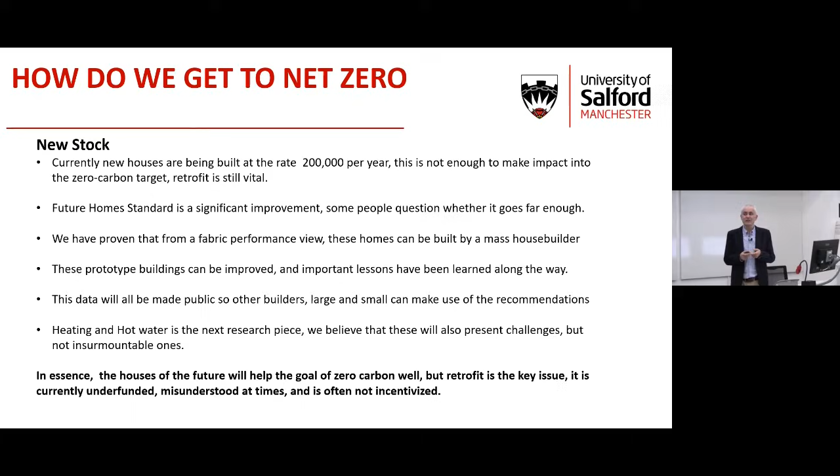Next is air quality - how do these buildings actually work for the occupants? So in essence, we think that the houses of the future will help the zero carbon goal well, but retrofit is the problem. It's underfunded, it's misunderstood, and it's not incentivized. So that's something that we need to change. And that's it, thanks for listening.